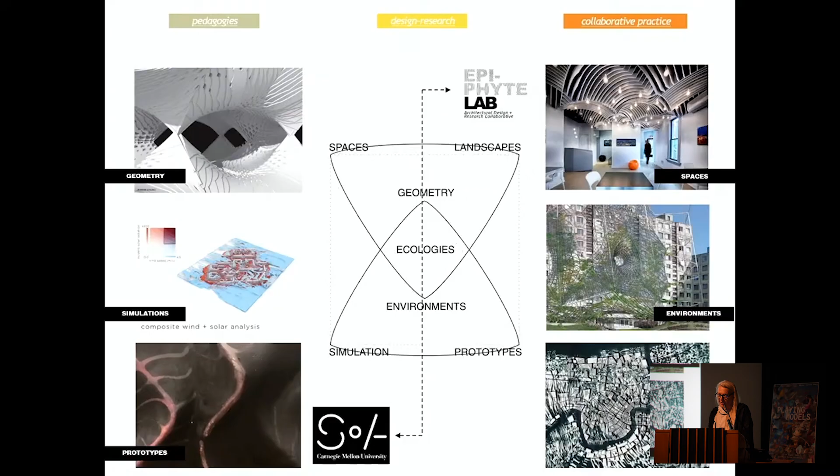Collectively, the body of work situates architecture as an ecologically engaged system, drawing on connections between perceptible form and its contingency on invisible forces, in which inscriptions of its attunement engage spatial politics.

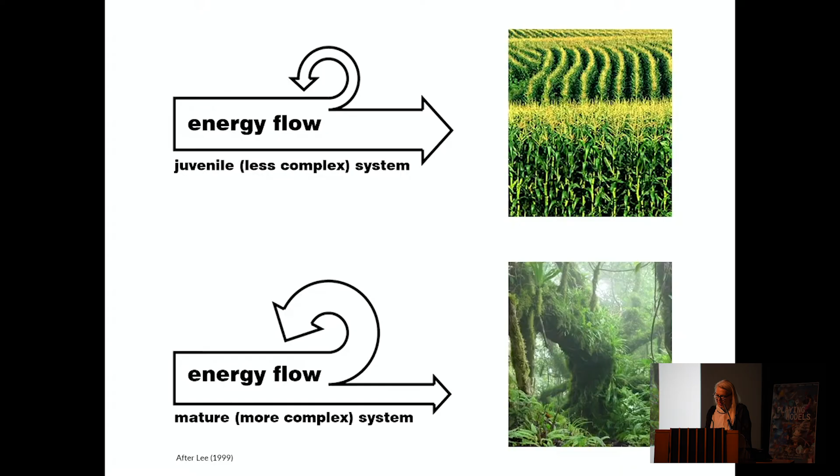One example is the nature of energy processing in ecosystems, which suggests that mature systems are much more complex and able to capture and retain energy, and are more stable than juvenile systems. There's a difference between the rainforest and a cornfield: in the cornfield, solar energy is processed much less effectively in its configuration than the complex system of the rainforest, which doesn't require the fertilizers and maintenance to survive.

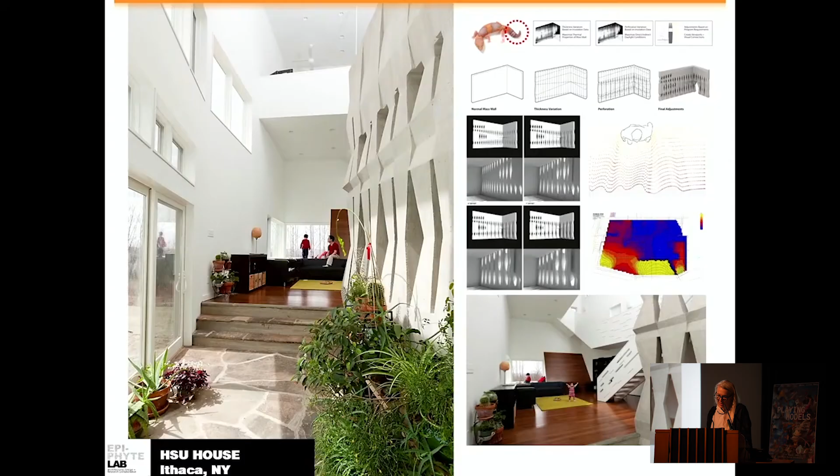In practice, this affects spatial distribution relative to the thermodynamics. In this particular project, the focus is on reducing dependency on mechanized systems, where the thermal mass is formulated as a replacement for mechanized air conditioning. It's shaped strategically to increase and decrease thermal transfer and delay in the summer and prevent overheating.

My interest is in shaping and distributing materials relative to natural processes, to instrumentalize these various expressions in the context of performance, politics, aesthetics, and collective perception.

So this idea, whether internal or external, relates to the living systems. The methods of inquiry are foundational in positioning the role of technology as a distributed and engaged system, where material identities allow us to cross over to new forms of materialism.

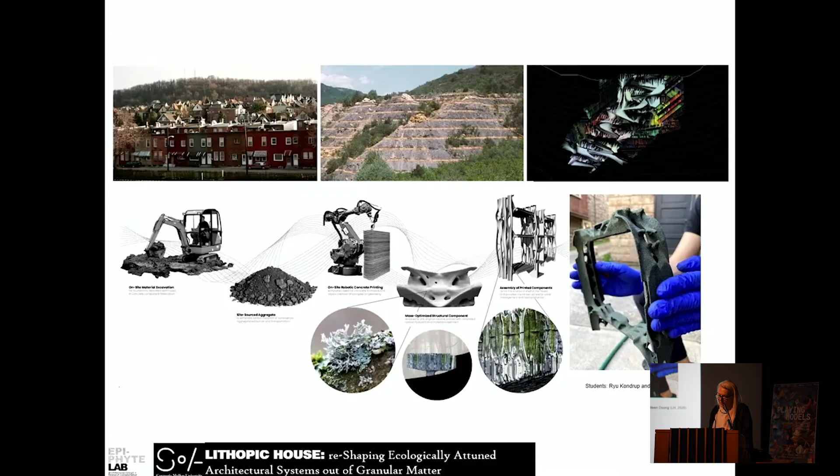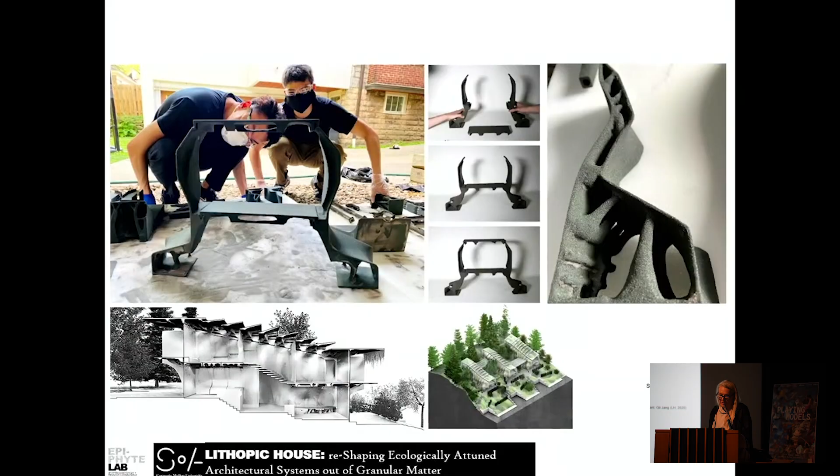So these new sets of tactile experiences we can discover through the exploratory work. And in this framework, the vibrancy and identity of design aesthetics become critical aspects of social and environmental engagement, which is tightly coupled with the histories of a place, labor practices, and contemporary manufacturing paradigms that are transforming redistributions of labor, thus repositioning architecture as a vehicle of ecological and communal resilience.

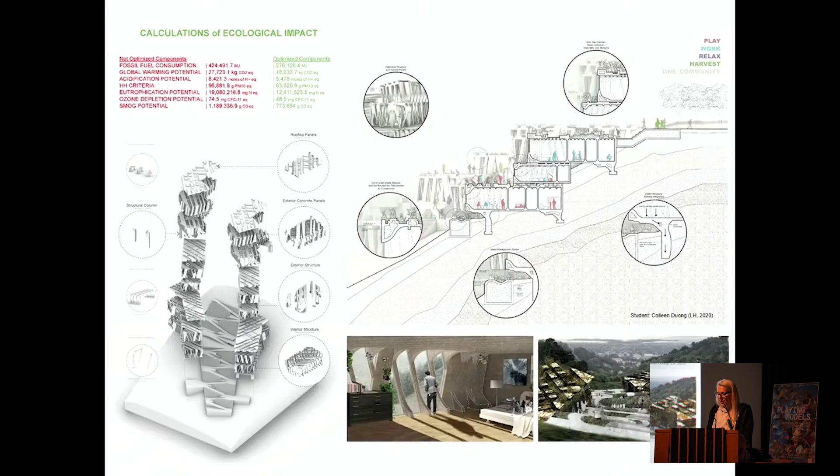While also raising awareness of construction of architectural objects in the context of their carbon footprint and socio-ecological placemaking, there's a path towards environmental empathy through the language of aesthetics that offers new forms of connectedness with other and familiar, which has both a tactile and quantitative interconnectedness through the methods of investigation, while allowing us to design high-stake caretaking and retool both work and pleasure in times of social and ecological crisis.

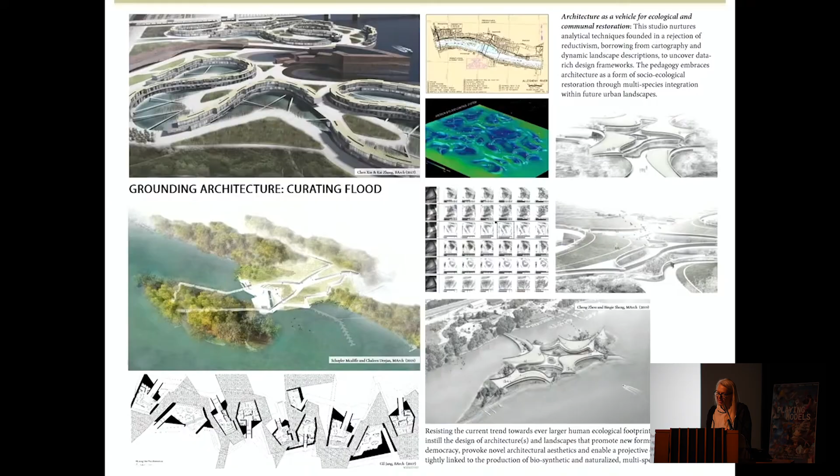The connection between architecture and landscape, or material systems and large-scale ecology, is critical to heighten our awareness of cross-scale relationships between human habitation, industrial manufacturing, and extraction of resources, as well as to offer both design cues and new sensibilities towards specific social contexts and urban frameworks in support of architectures that engage urbanization strategies rooted in natural processes and limit extraction needs that support self-determination and decarbonization.

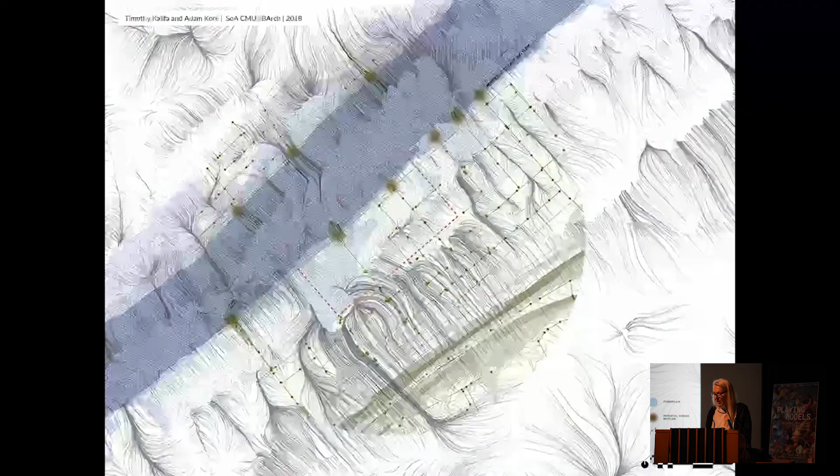So the use of drawing and simulation as a form of image has always been critical in this effort to collapse behavior and figure. This kind of drawing always straddles empirical and metric-based input, navigating a visceral ambivalence toward the tension between determinacy of data and the ineffability of the sublime.

So this framing situates the research within a graduate program that I have been developing for the past few years, which I call Master of Science in and Beyond Sustainable Design. The 'and Beyond' is kind of a secret title of the program that is not institutionalized. The program is centered on architectural response to climate change, expanding and really investigating the investigation.

So it's really focused on methods that position the built environment as an applied ecology across scales, the transscalar relationship of drawings on regenerative potential between material and landscapes in response to setting up ecological metrics, which has really transformed the program over the past few years.

This is a development through time, there's a little time frame on the bottom, drawing a connection or framing between the particular scale from materials all the way to ecological territory, looking towards the ecological impact and diversification of research methods that increasingly rely on machine learning and AI strategies.

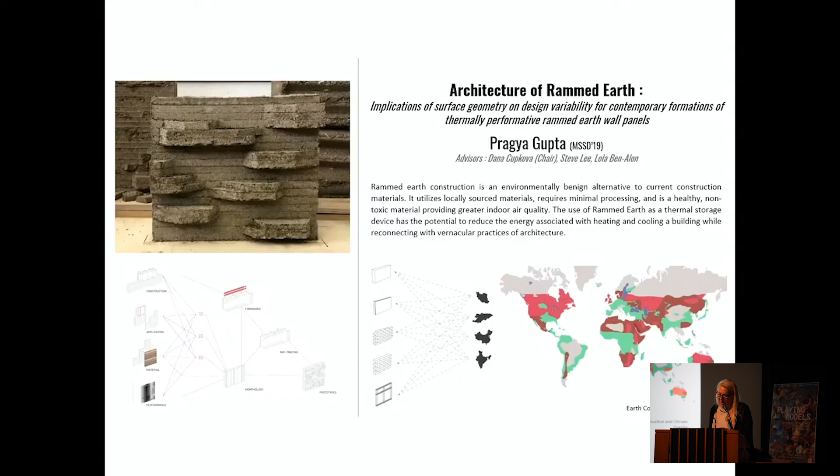And a creative approach to ecological metrics. These methods generate a kind of tacit knowledge across scales that can be embedded in the simulated image, which conditions and maps the behavior of natural processes and allows a mediated understanding of these dynamic systems. The image carries layered information through varied algorithmic logic that can be used exploratively.

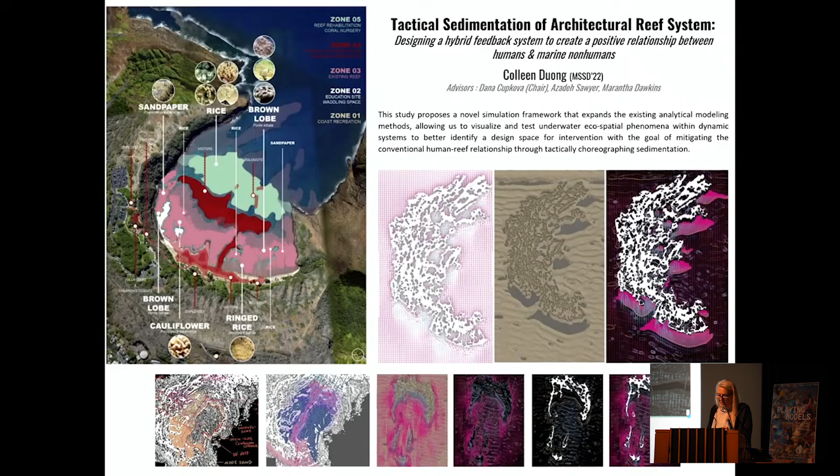In this case, a tactical sedimentation of both physical simulation and computational simulation starts understanding the health of biological systems, underwater systems, or it can be used as solution-driven data, such as using satellite data and computer vision as input to address issues of strategic green infrastructure applications.

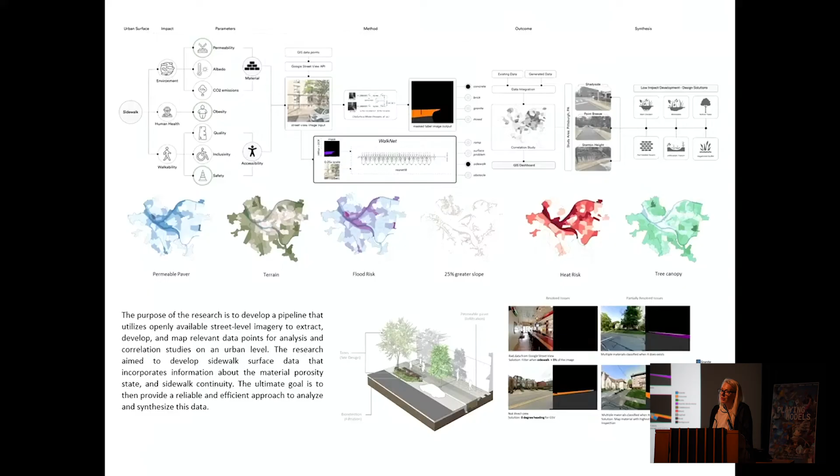So this approach specifically uses machine learning as a subset of AI, which enables machines to learn from data without explicit programming.

So the bigger umbrella of this way of thinking, or how the projects are situated - this is one of the examples that connects research, collaborative practice, and community engagement.

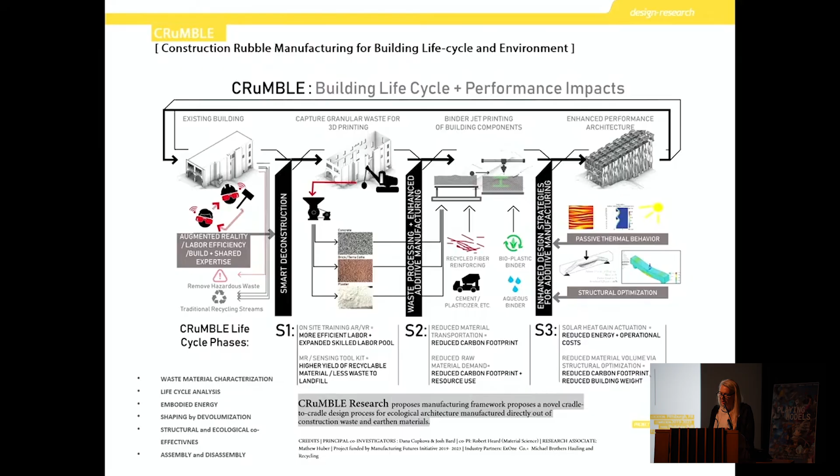It's a research project called Crumble, which stands for Construction, Rubble, Manufacturing for Building Life Cycle and Environment. It looks at novel cradle-to-cradle design processes for ecological architecture, utilizing construction waste and earth materials through the use of advanced manufacturing.

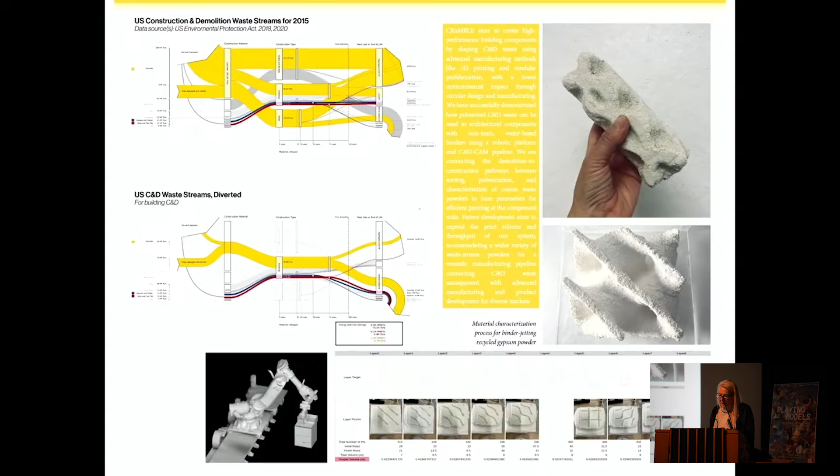And this research focuses on the regional impact of material reuse and the shape factor in designing low-tech material systems with specific performative qualities, but it also engages factors of environmental justice and collaborative co-authoring with community organizations to create engagement pathways within communities affected by environmental pollution, promoting more sustainable development practices focused on self-determination through creativity.

So there's a kind of collaborative design process that engages both the teaching of design thinking and the teaching of the technologies. This is one example of structural entanglement of technological innovation and community empowerment that allows us to rethink the role of technological determinism and its impact on our culture, and technological elitism brought forward by our institutions.

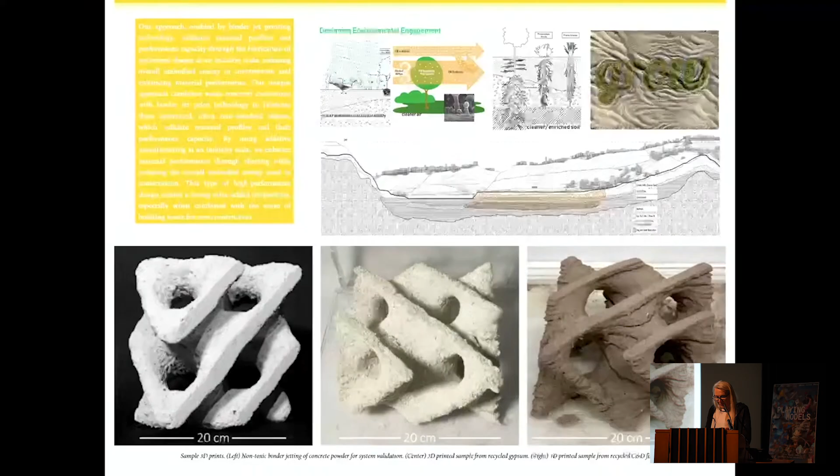So asking these questions and exploring early design solutions is both a form of creative investigation, but also a thinking through, or experimenting with, these technologies.

This is one of the pathways through the Rocking Cradle projects, the urban furniture project that was interested in increase of biomass growth. A few years back we started looking at style transfer as a way of ecological feature transfer.

So with Rocking Cradle we carried forward some of the technologies for mapping water and hydrological and geological processes into the articulated surface, using sand printing adapted as a technology to engage with the landscape. It's the idea of landscape waste adaptation into these carrying objects that create visual intuition for the ways the landscape behaves.

So these sand-printed vessels are integrated into the public tree nursery. They become a kind of ecological infrastructure directly informed through these simulations of hydrology and geology, and allow for environmental stewardship through the instigation of urban play.

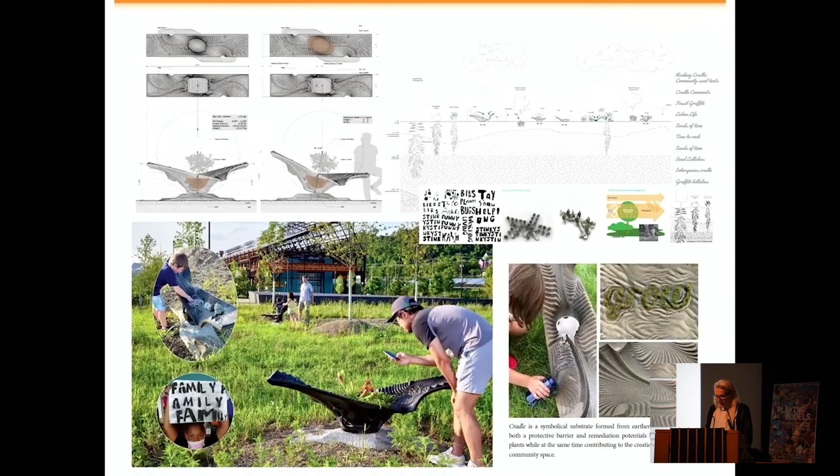The other part was for us to look at the effectiveness of these techniques in terms of biomass integration, using some machine learning models. In this case, the CycleGAN uses two neural networks, a generator and discriminator, to compete and generate new data samples from the training data.

So we looked at the characteristics of the hydrology that enables lichen growth. Lichen is a bioremediator as much as it creates a layer of growth on the object.

And the idea here is that there's a directness to the pattern that allows for ecological engagement and conditions the biomass growth, allowing us to predict or build not just for a human, but for a specific ecology.

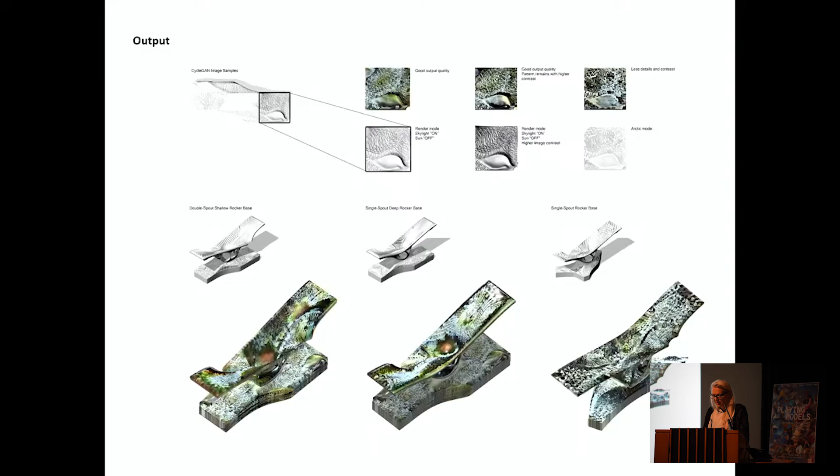These studies were done about three years ago, and as an augmentation, a parallel study for these vessels - this is a kind of current state of growth that is more recent.

So all these techniques - I'm trying not to go too deeply into each individual project, but to create an overview of how the processes of investigation start channeling towards some of the pedagogical approaches that then trickle down to undergraduate design thinking, where we connect generative AI and augmented design instrumentalization towards the spatial model.

One issue that happens when you try to connect material research towards prototype building is that there's a limitation to its application, both in terms of design thinking and in terms of its impact at a larger scale.

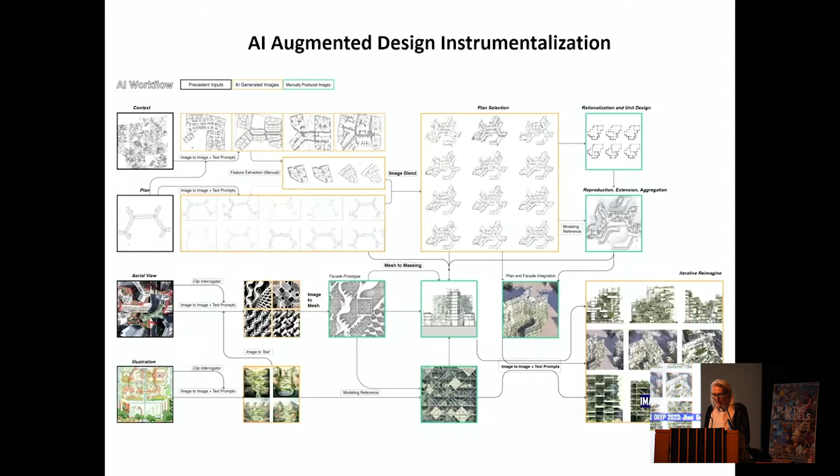So here, the magic of instant image generation through diffusion models, in the context of a simple understanding of translating two-dimensional into three-dimensional drawing, becomes really interesting as a kind of design sketch.

So the algorithms of depth mapping, and understanding an image as an intentional creation of data that produces a spatial connection - in this case urban systems - allow us to be deliberate, creating a framework of constraints from performance to materiality.

So how the image actually produces a physical model. There's a kind of circular logic here that focuses on translation of physical prototypes with a specific material logic to the architectural and spatial ideation.

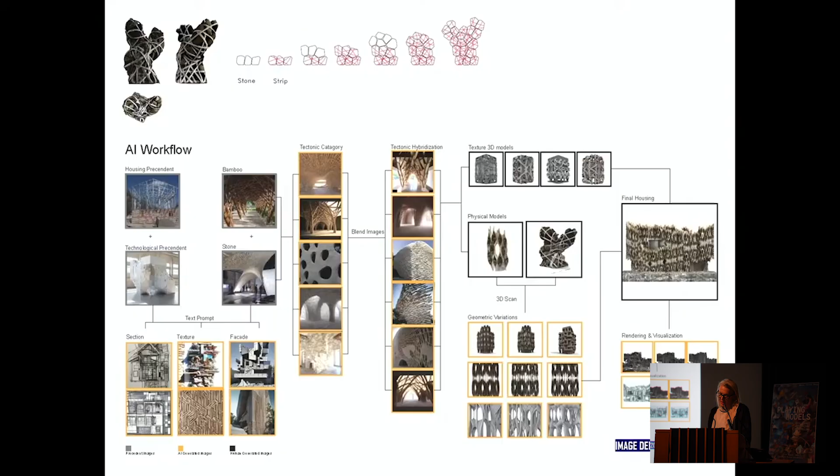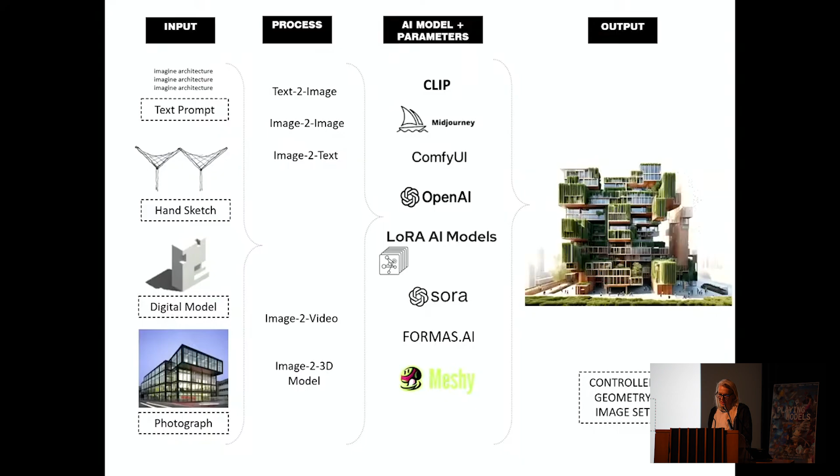The big idea with the student work is to curate AI tools while requiring a translation of material fidelity between image, materiality, 2D and 3D. We use many tools that require a basic understanding of these processes that are now common, from input processing to understanding the language model through the clip model, to control geometry sets.

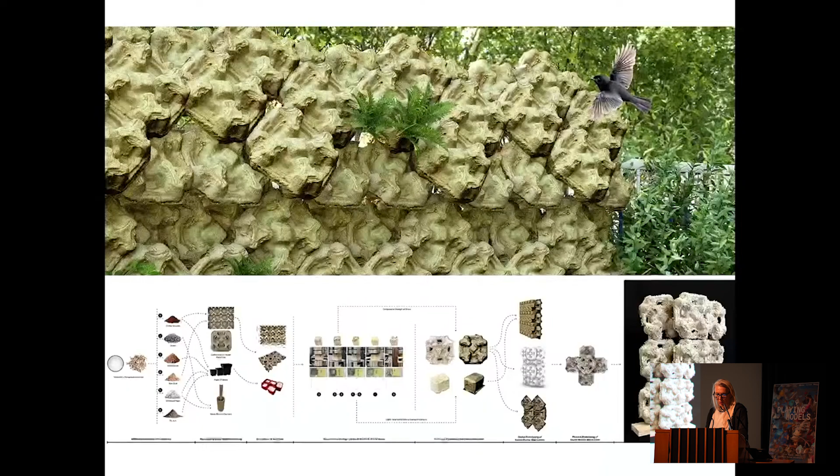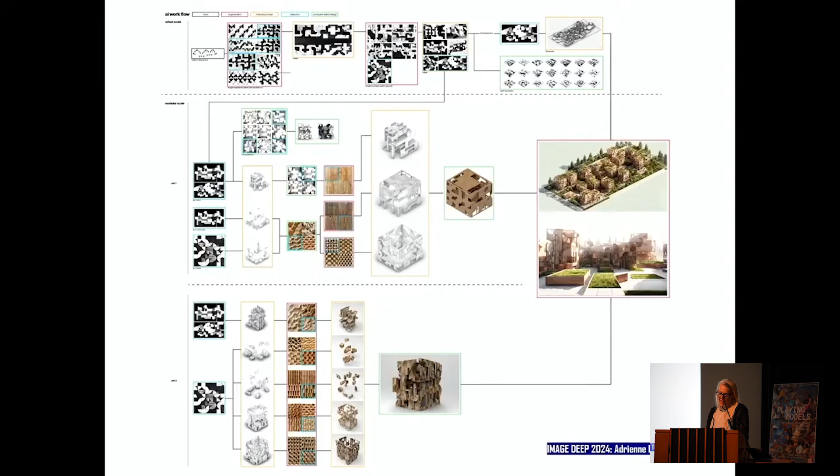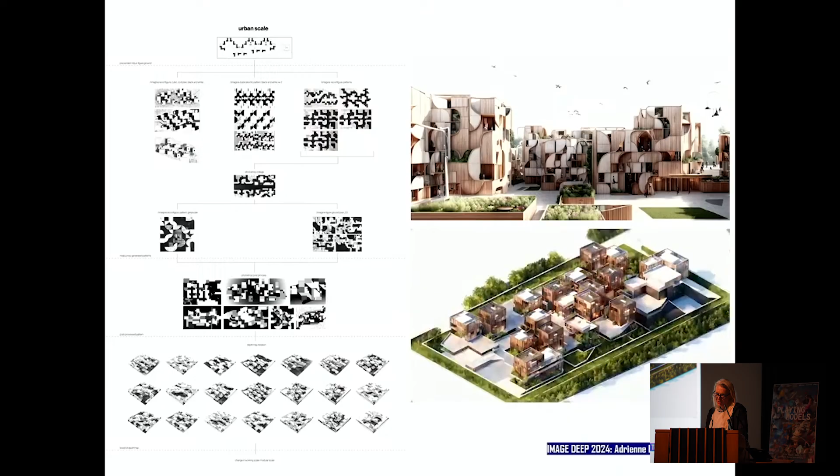Video generation and understanding of 2D to 3D models - the process always starts with capturing the embodiment of the material research, the form of making that takes on related labor practices, in this case the use of recycled formwork for casting and growth, before engaging with the tools and workflows, understanding how you direct the process consciously, preoccupied with a specific spatial imagination in a concrete context, limiting exploration to a constrained set of variations, whether urban constraint or material interpretation.

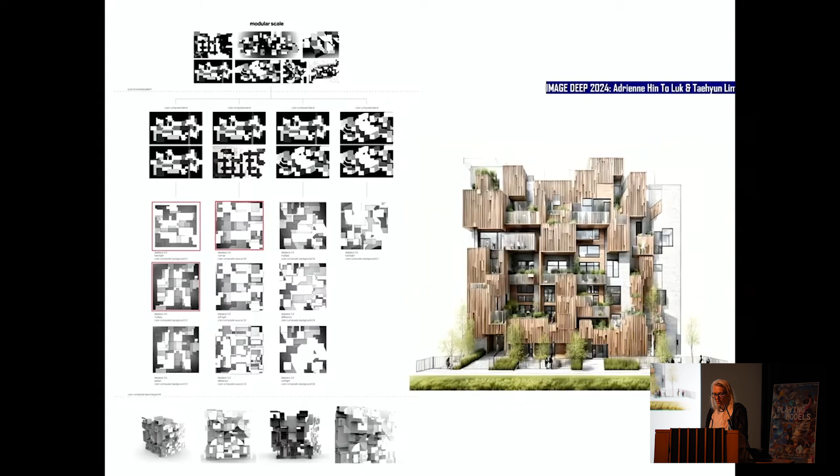With this in mind, I'd like to quickly show two examples of a studio and a research project we're currently working on. Looking at one titled Micro Repair, a studio focused on a bottom-up regenerated growth system, in collaboration with a local community organization situated in a declining neighborhood facing environmental pollution and decay.

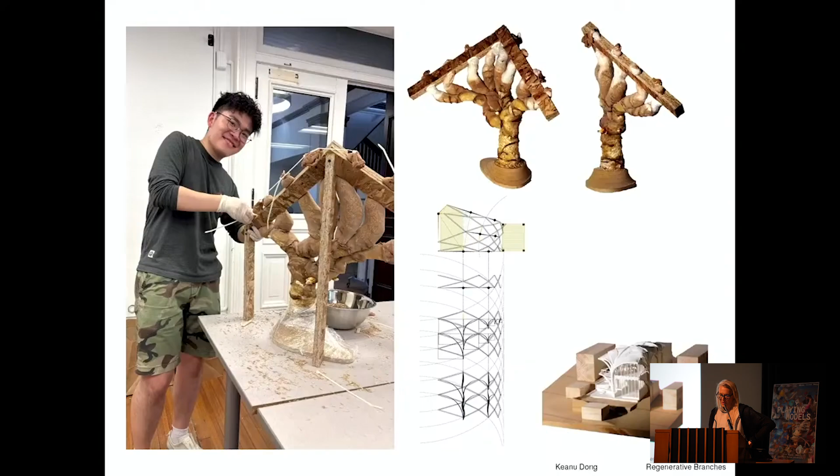The material research in mycelium allows for bioremediative and binding abilities, looking at the reuse of current material systems in connection with physical prototypes and growth models. So we start by actually growing the physical materials first, then generating the spatial model through image curation.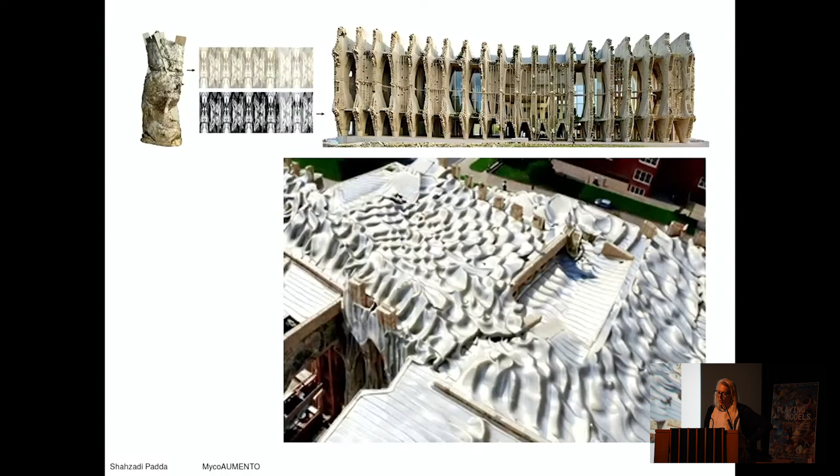This is the final collection of student work that started with the physical prototype, understanding a context of an AI-augmented design process that starts by thinking through these labor practices - what I call a 'weak structure,' meaning a bundle of construction waste that allows for thinking of a construction material, both in its structural compressive strength and form of aesthetic.

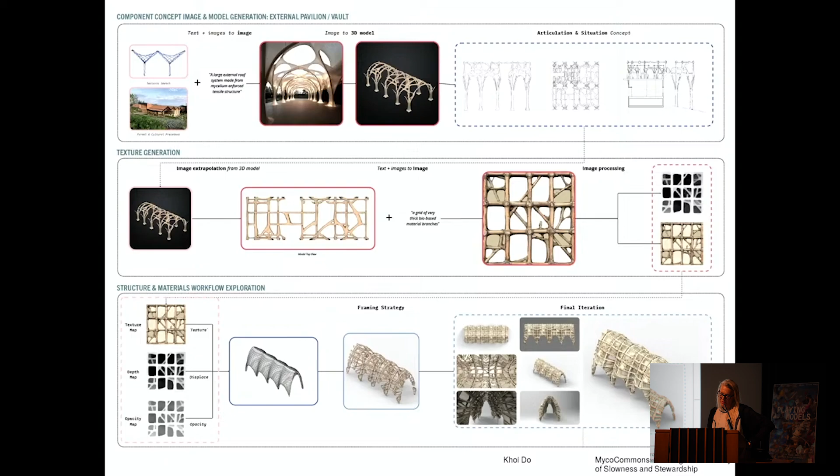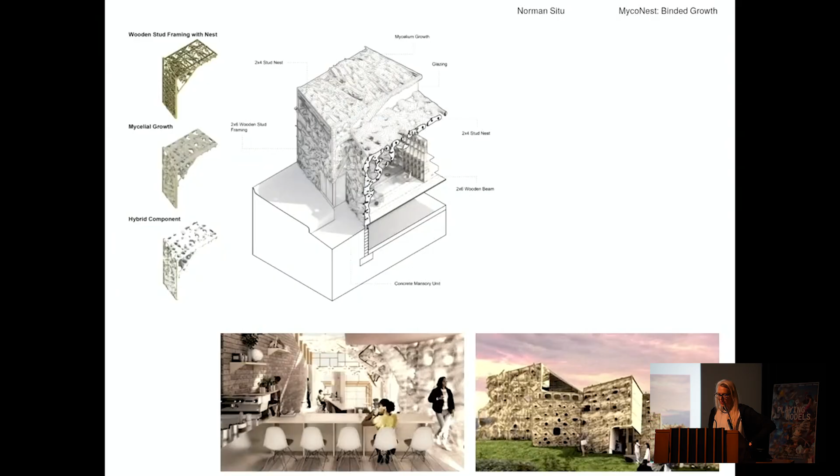It serves as a regenerative process where the design thinking, or AI augmentation, allows for controlled image generation with a set of information, where that image becomes easily translatable in its fidelity into the spatial model. Another example is a nest-like structure allowing for repurposed framing material and a binding model, as well as using earth casting and grading as part of form making.

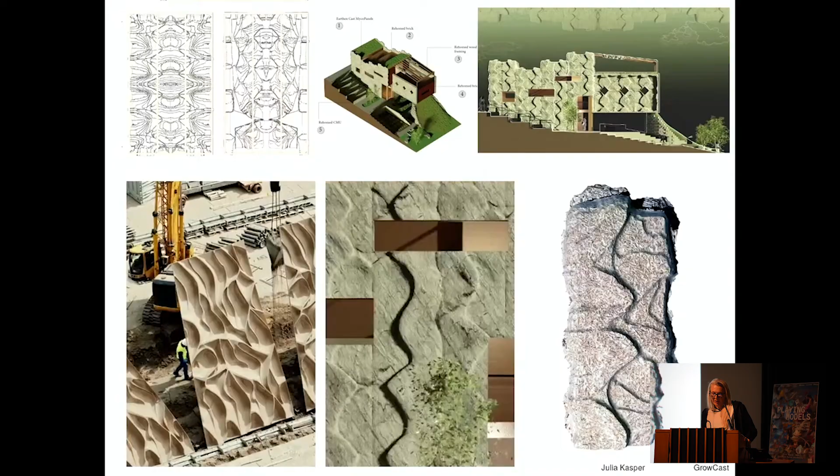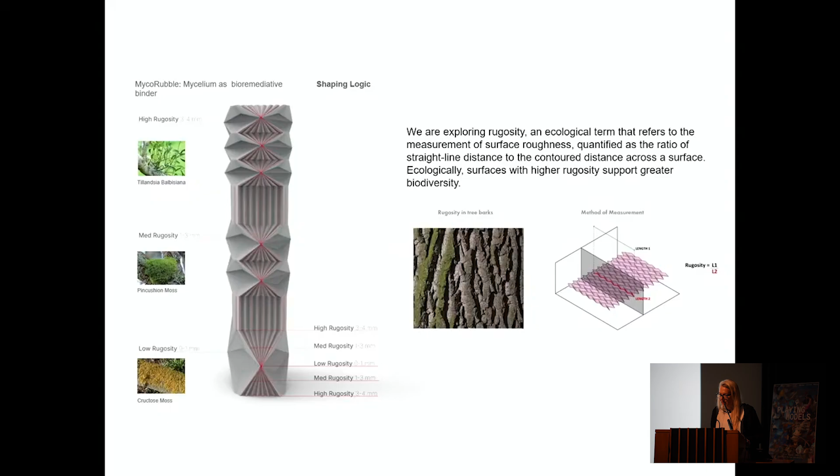Currently this is happening in the context of regenerative material research into mycelium-based composites that take on rubble repurposing in the context of a gabion wall building material, with specific calibration and testing on binding and structural capabilities, as well as combining a layer of performative capabilities of form and texture and organization to engage the local ecology.

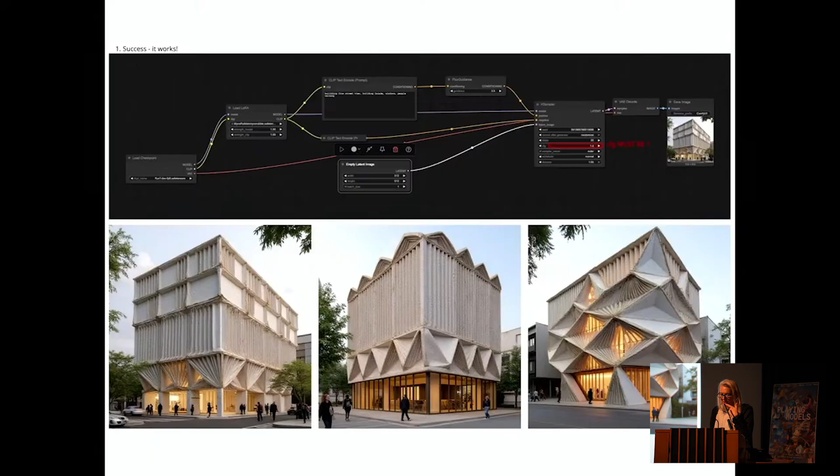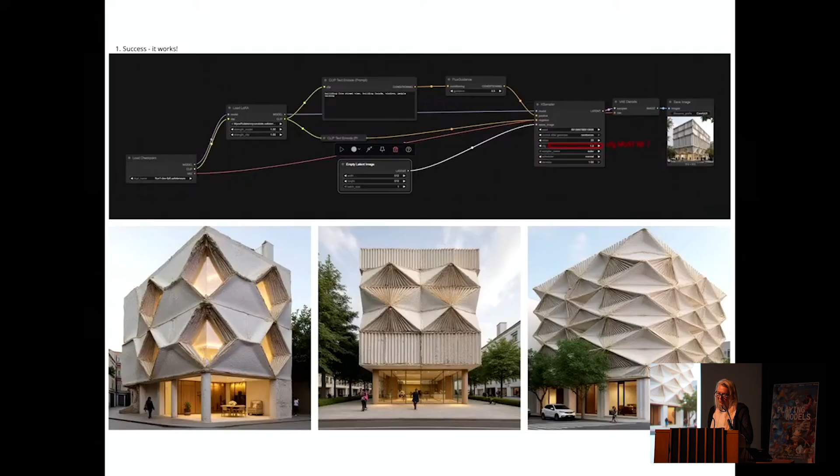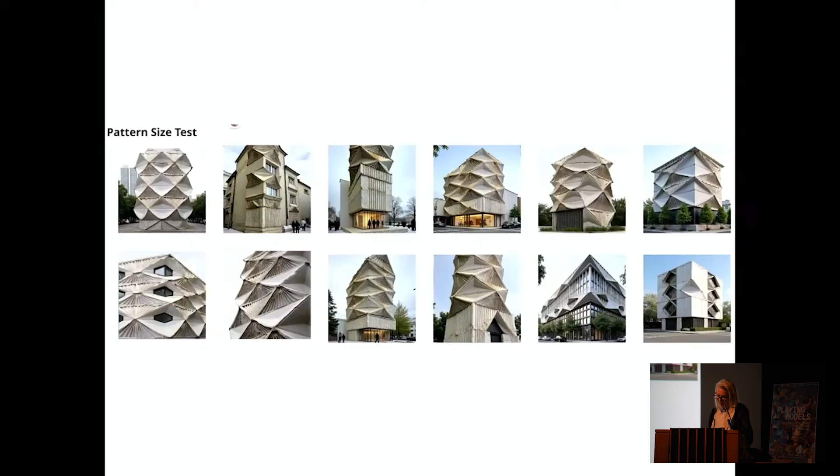So what we're starting to do is, through directed training, capture the capacity of these models towards more directed spatial imaginations. This is perhaps more difficult than it seems, and although these images are very naive in their actual architectural reality, it's trying to essentially collapse the performative abilities of the material into the spatial imagination, through the choreography of images, to build in a constraint of specific site, program, and labor practice, which would require another layer of models in a more design collaborative space.

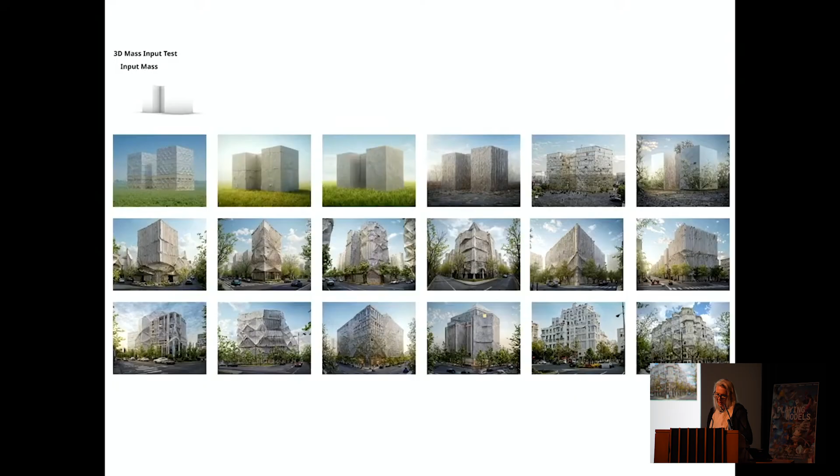So to direct this capacity more intentionally towards both generative imagination and criteria that are space-related and possible, to gain a more constrained, directed investigative approach. It's not that different from what's currently happening with generative AI. Really, the intention or curiosity here is to think through this process as connecting creative exploration to ecological impact, in a shorter period of time.

The goal is to move away from the kind of hallucinations that are interesting in a different context, but for us that's not necessarily where we're going with this. So thank you very much.

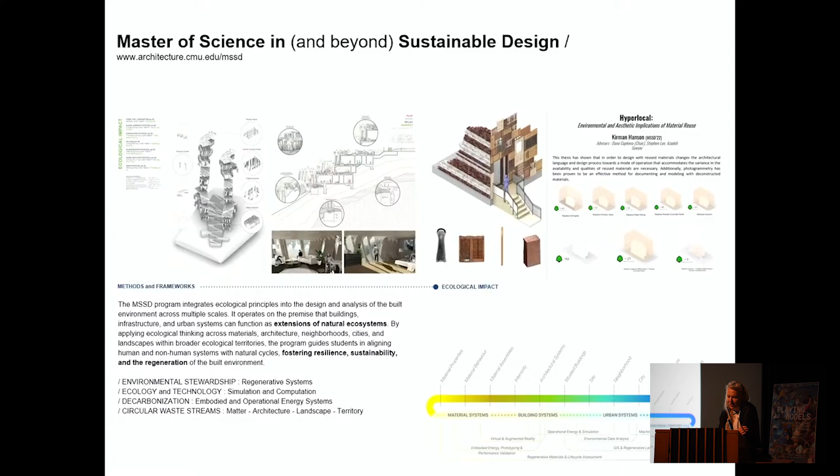So a lot of the reason why— oops, this is the wrong one, this one. I keep thinking I'm on a very different image. If I keep describing the wrong slide, I apologize, but I just realized that right now, so I guess it's too late.

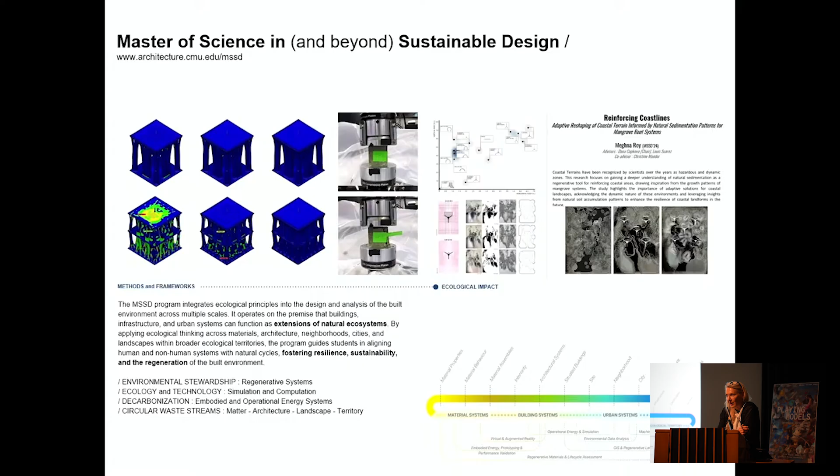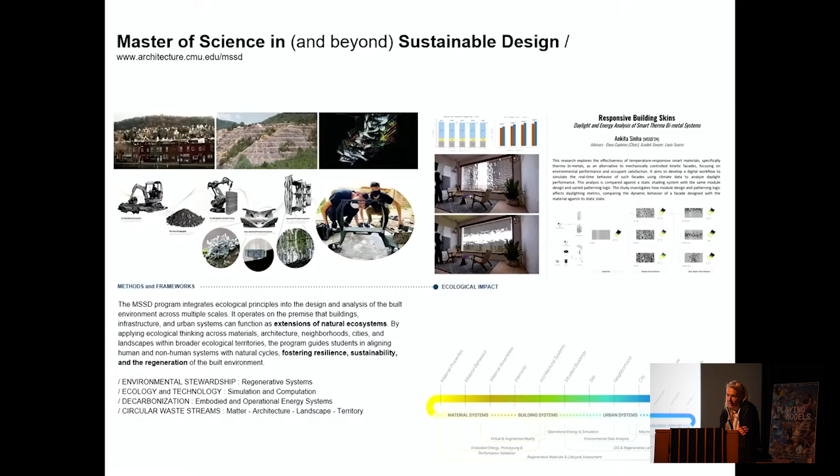But the reason I wanted to put up this slide is because it demonstrates the diversity of different projects that range from very low tech to high tech in terms of combining. These are different theses within a graduate program that I lead, and they're all rooted in the metric of a particular data set, and the data set is very contextual—whether that's thermal mass of the rammed wall system, connected to the particular geopolitical system it's done through.

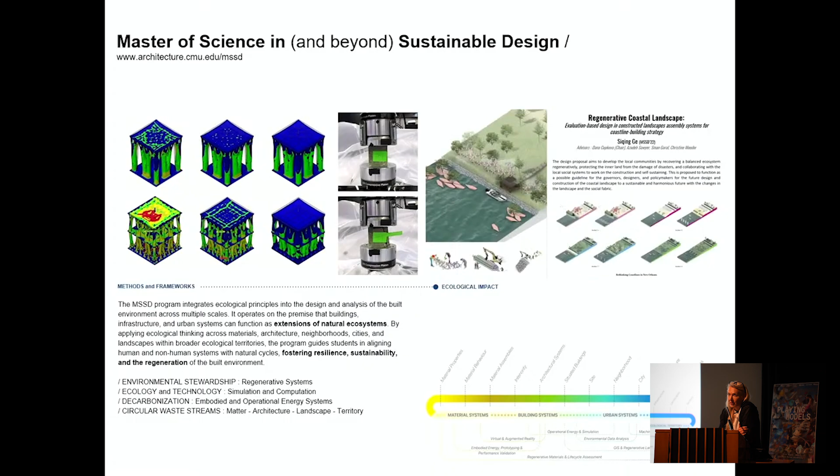Investigated through not just material composition, but through adaptive low-tech formwork that allows for variation, but really looking at a labor practice of the formwork that is hands-on, where the computational overlay is more in instrumentalization of the design to allow sequencing of that formwork to then produce particular thermal conditions.

Or it's about the bio indication, where the exuberance of color from combining mycelium and bioplastics using food waste allows us to think about particular bacterial conditions, and where the shape of the wall itself, because of the thermodynamic and conductive behavior of the interior wall—one of the reasons we're cold is because everything's flat here—allows for a color change, which becomes both communication and an indication of knowledge.

And also it becomes an aesthetic code, right? So I think we're so disconnected from the behavior of natural processes that we don't necessarily read ecology as information. We read ecology as decoration. So, for example,